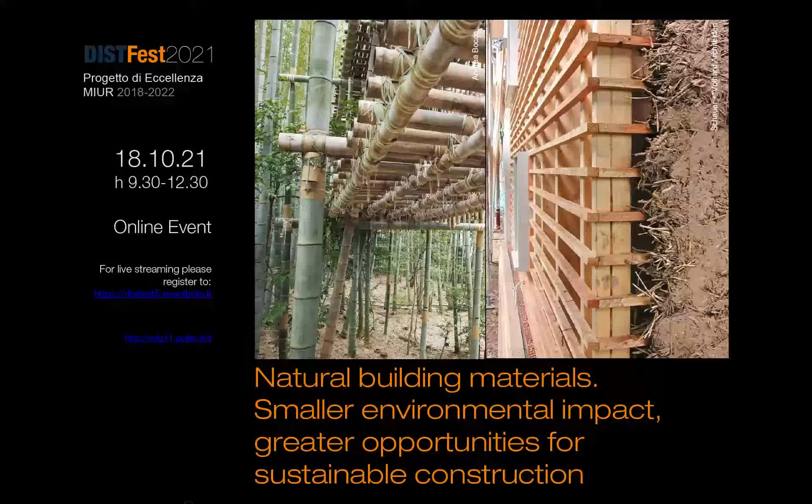As you might be aware, DIST, my department, is a so-called excellence department in Italy. We won a national competition, or rather we were among the many winners of a national competition 4 years ago. We were supposed to present a research program, and our idea in 2017 was to assemble a quite diverse group of initiatives under the umbrella of Sustainable Development Goal number 11.

You are certainly acquainted with the UN 2030 Sustainable Development Goals. Number 11 out of 17 is titled Sustainable Cities and Communities, and the overall goal is to make cities and human settlements inclusive, safe, resilient, and sustainable. Each goal has a number of sub-targets. Target 11C is to support least developed countries in building sustainable and resilient buildings utilizing local materials.

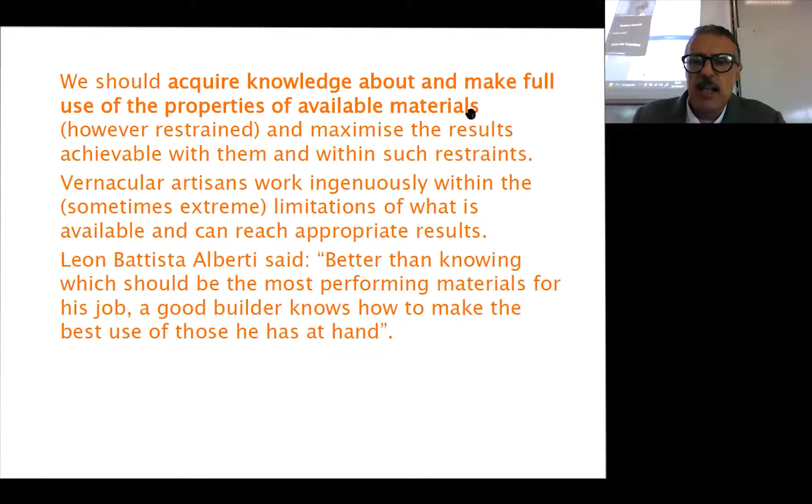Notwithstanding its long history, natural construction is still at a pioneering stage, because in spite of admiration of vernacular architecture, this is perceived as something belonging to the past, something backward. So today it is quite a problem to obtain building permits, in spite of the fact that natural materials, which were in use for centuries, are now considered very dangerous.

There is much more faith in synthetic materials that are likely to degrade in a very short time. Now, it must be understood that industrial substitute materials have usually been developed to reduce labor and construction costs, not so much to increase the quality or security of buildings. So their widespread usage is more the consequence of investment in money and effort spent to deal with these problems than their superior performance.

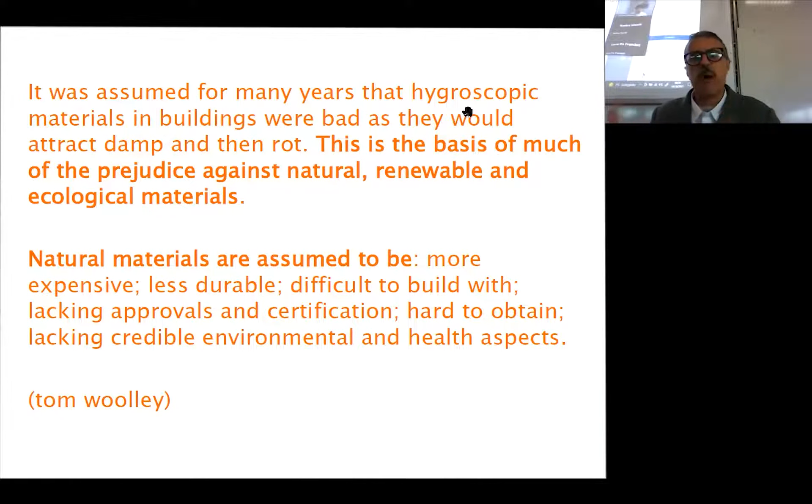It is a common experience that natural materials are assumed to be more expensive, less durable, difficult to build with, lacking approvals and certification, hard to obtain, lacking credible environmental and health aspects. Some of these assumptions are actually true or partially true, but this is not always the fault of the materials themselves - it is usually the problem of the socio-economic system around these materials.

In fact, the slightly higher costs associated with building with natural materials is the result of a tax system or a subsidies system which encourages the use of fossil energy rather than human power.

Anna Heringer said in an interview a very interesting thing that I like to quote here. She said, 'I think that it is not the missing technologies that prevent us from building sustainably. It is not the missing consciousness either. It is the fear of vulnerability and transience.' So we want buildings which are indefinitely durable, perhaps even an excess performance of durability is included there.

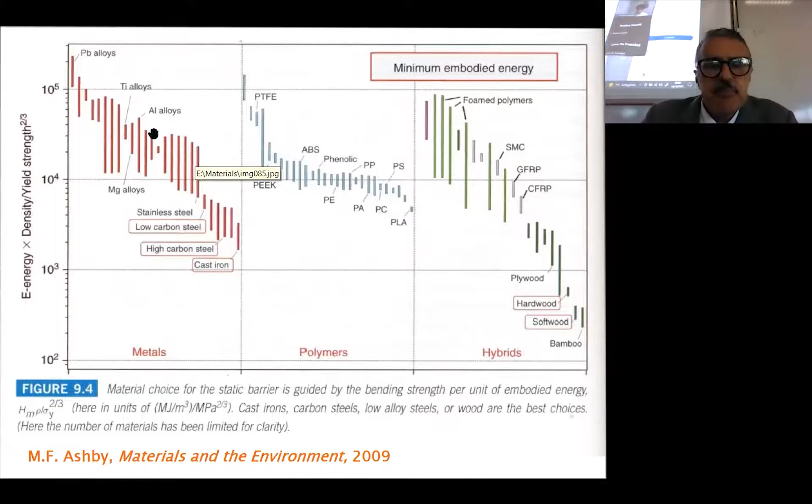Acquiring the ability to design a building using simple technologies based on good craftsmanship and careful selection of local and natural material can be a task, as does obtaining a building permit. These materials are often not covered by standards or environmental assessment software, and this is also why it is so difficult to make use of them.

But nevertheless, it must be admitted that not much is actually known about natural materials. A detailed and scientific understanding of their properties and characteristics should be developed, also relying on experimental buildings and field study of traditional buildings. And these are among the reasons why I treasure so much the contributions today of Professor Toki and of architect Volhard, because they have developed a deep understanding of some materials and have tested scientifically the properties of these materials, and at the same time have been using these materials in real buildings which work. So it's not an ideological stance. It is a very practical knowledge that has been developed and tested over many years.

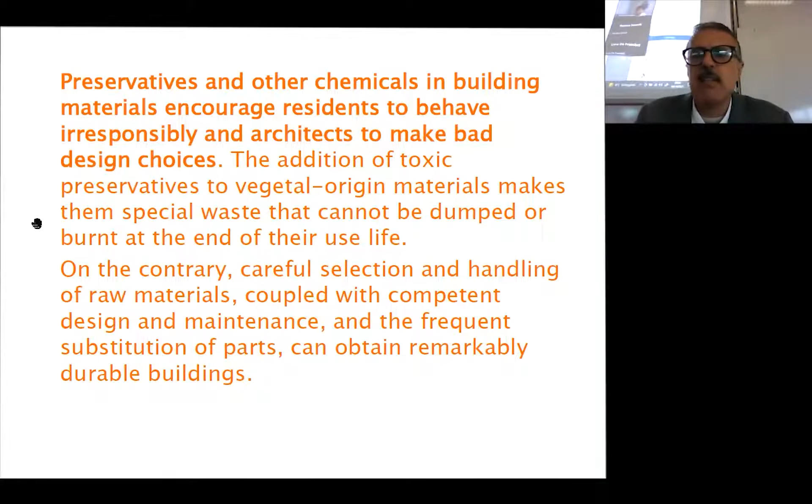Preservatives and other chemicals in building materials encourage residents to behave irresponsibly and architects to make bad design choices. And there is also a health problem connected with the use of chemicals and preservatives in foodstuff, as well as in the materials we use in our buildings, in our homes.

Typically, the mainstream medical view downplays the significance of environmental causes, raising doubts about environmental improvements because of the cost, and instead they prefer drug treatments. While, of course, the first step would be rather to avoid contamination. But we have been taught to live with contamination, to tolerate it, to accept pollution as a part of progress, as a part of our daily life.

It must be very clearly stated that every petrochemical product is toxic. It is just a matter of extent, how much, either to people or to the environment or both. It is also very difficult to recycle materials, even metals, if chemicals are involved.

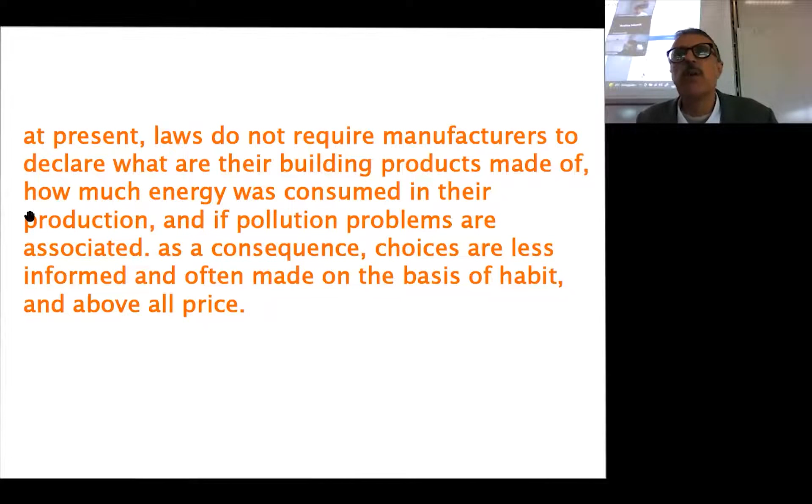I think that Peter Harper's low carbon materials plus industrial vitamins is a very interesting concept, which epitomizes a realistic, balanced position. Because, bluntly, modern projects can be built with a majority of little transformed natural materials whose environmental impact is very limited, plus a few highly manufactured products which allow us to obtain a few irreplaceable performances which cannot be reached otherwise. For instance, today's buildings reach very high performance, largely thanks to technologically advanced windows.

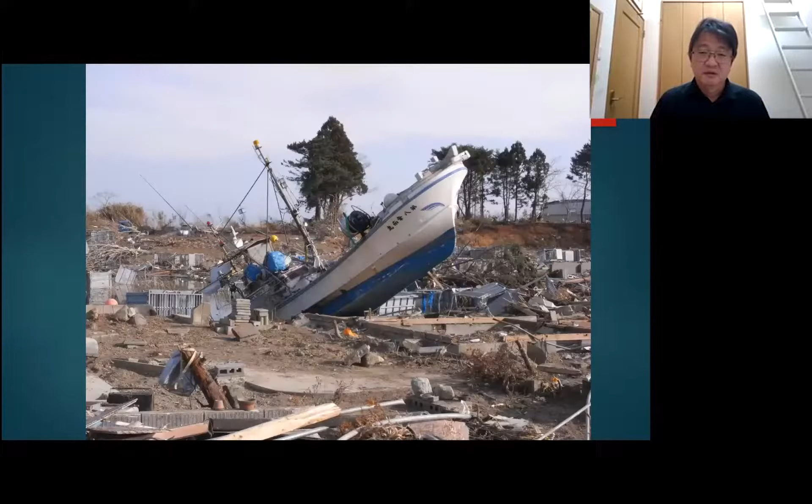So why use bamboo? The short answer is there was nothing other than bamboo. We had neither money nor material, yet there was a lot of bamboo. Professor Toki talked with one local who said we need to rebuild the town, not for you, not for me, but for our children and grandchildren, so they can see a town they can be proud of. For that we must persevere. But what can we do when we don't even have a place to gather together? Professor Toki felt he had to do something, as a person and as an architect.

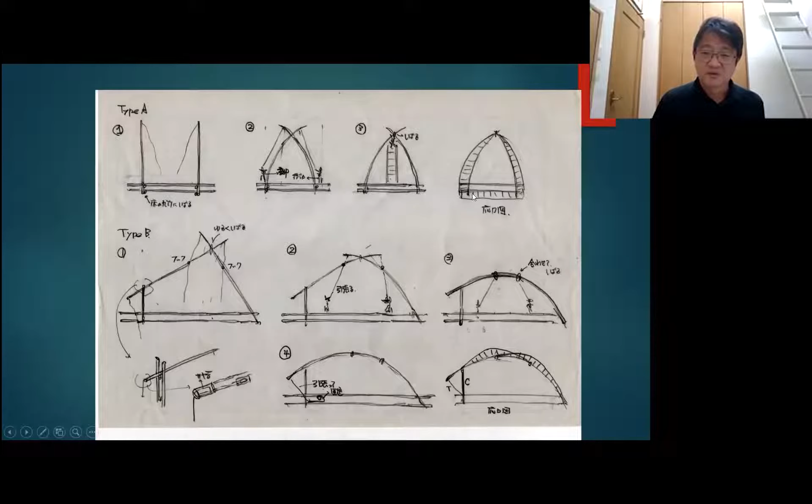The answer we got was an arch, a self-supporting arch assembled on the ground. With bamboo's strong repelling force, normally one would make concrete foundations, but we couldn't do that. So we made a truss below the bamboo and connected the two fixed poles with ropes in the middle. With these frames, we could line them into a radial shape to support the roofing and make the structure of a building.

To create an opening so people could get in, the heights and widths of the frames were gradually changed as they were lined up, resulting in an endless spiral-shaped space.

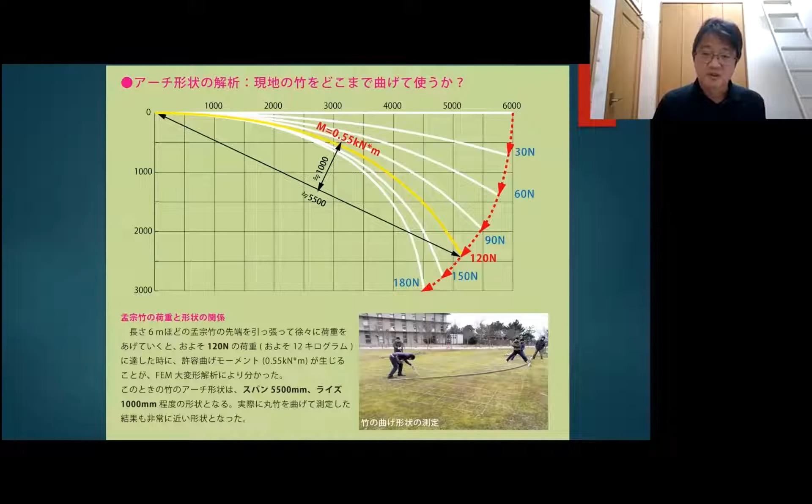We didn't know much about the material, so we needed to understand it more. We brought back plenty of bamboo to our campus and ran experiments, mostly on the mechanical properties and how much a full-length pole of bamboo can bend.

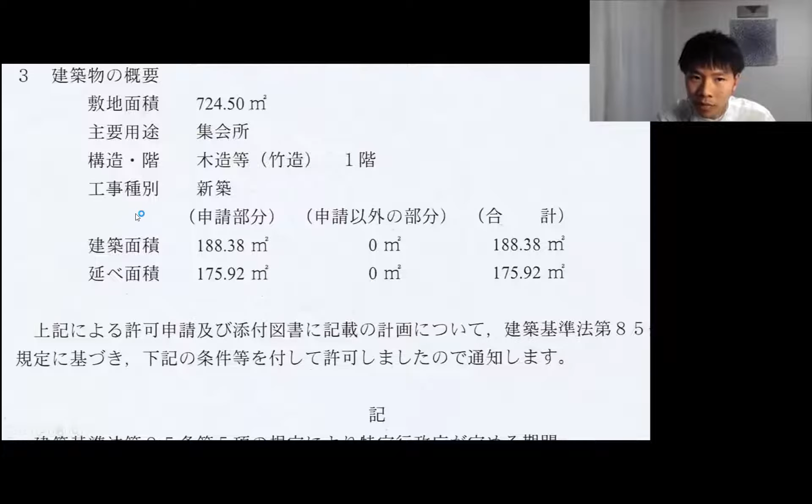Permits were a big problem at the time, because in Japan bamboo still hasn't been recognized as a structural material. There had been few to no bamboo structures in Japan until Bamboo Arch passed the application. Although only a temporary structure, Bamboo Arch, as far as we know, is the first full bamboo building in Japan.

After permission was confirmed, it was time to construct. About 40 students from all over Japan gathered to construct the arch together.

There was nowhere for us to stay in the disaster area, but thankfully a local offered us the use of their backyard, so we set up camp there. Construction started with clearing the rubble and praying for those who had lost their lives in the disaster.

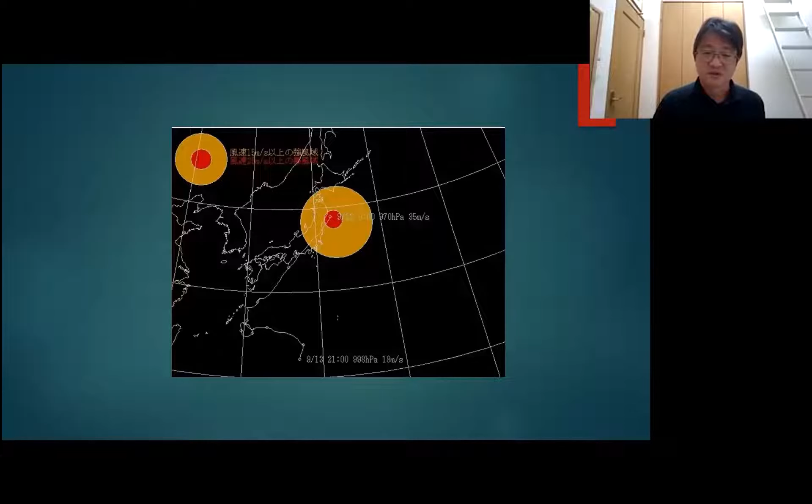Just as the frames were standing, the typhoon hit directly. We went back to camp, and the next day at the site we found everything had been knocked down. It was hopeless to say the least, and everything went dark in front of my eyes. But looking closely, though fallen, nothing was actually broken, so we could stand it back up and rebuild.

We held an emergency meeting, with only 5 days left until the deadline.

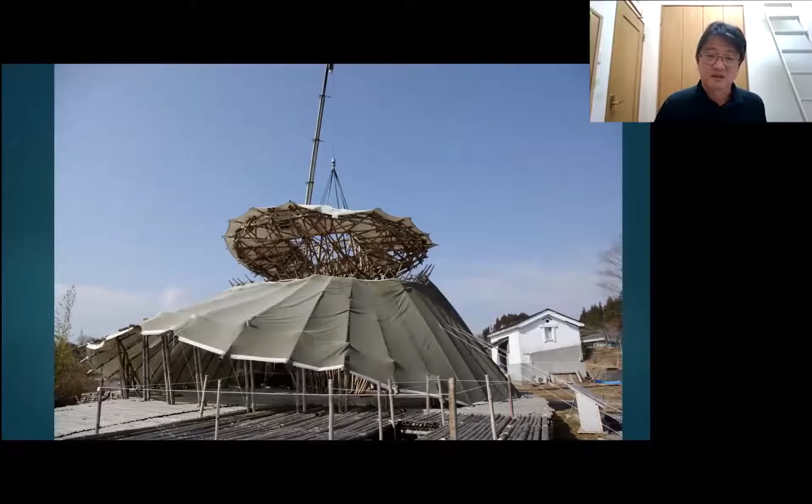After 7.5 years, we brought some of the dismantled bamboo back to our lab to study its strength and condition, and the rest was ground into chips and returned to the earth as fertilizer.

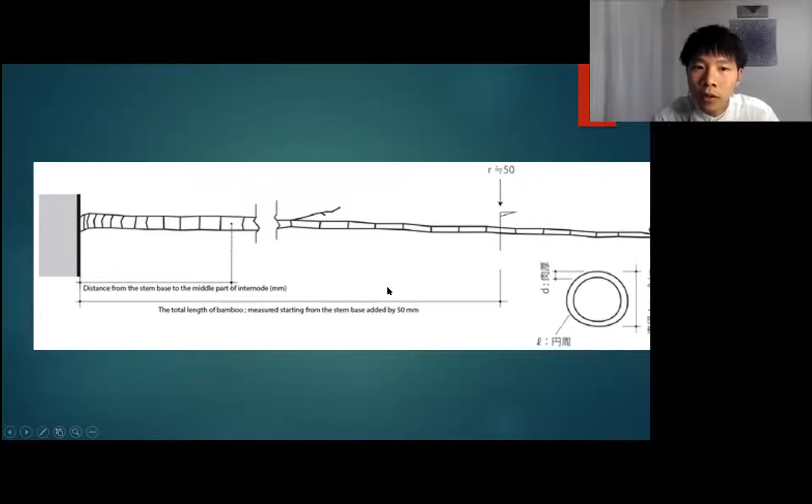When using natural bamboo as-is, the first challenge is that the cross-section is unknown - the diameter and wall thickness gradually change, making it impossible to calculate. This was the biggest problem: the section size differs for each unit and each point along the length, making structural analysis hard.

So we split the harvested bamboo in half and measured the diameter and wall thickness. We did a full research to find out the rule for how the diameter and thickness varies.

In Japan there are two main types of bamboo, Moso and Madake. Each has different properties, but we found that a formula could be established for each. While each type differs in its rules, sure enough there was a rule for the size change - with this, one can predict the whole cross-section of a bamboo by only knowing the root size, though the rule differs for each species.

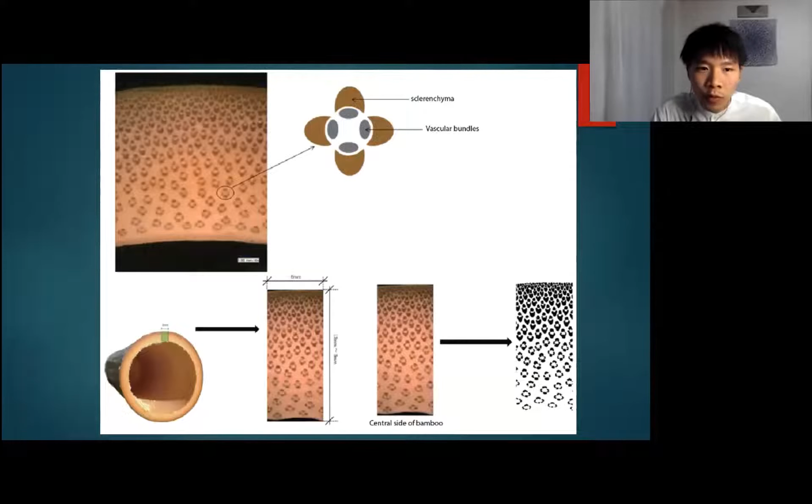Looking closer, there are vascular bundle fibers in the bamboo's cross-section that become denser toward the top, which explains the higher strength. Under the microscope, we found the cellular walls at the top of the bamboo are denser than at the roots, and concluded that's why the upper part is stronger.

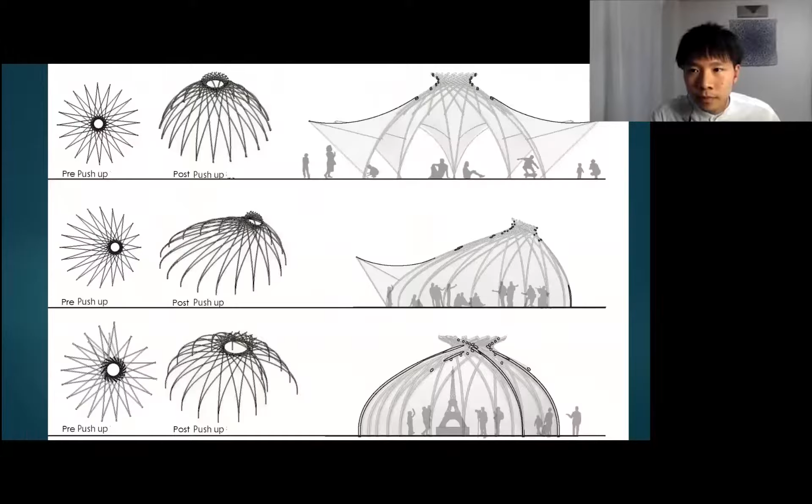Our second approach is to make use of engineered bamboo. Bamboo has about 10 times the strength of wood and one-third that of steel in tension - we wanted to use this to create new, delicate architecture, making bigger spaces with even smaller structures.

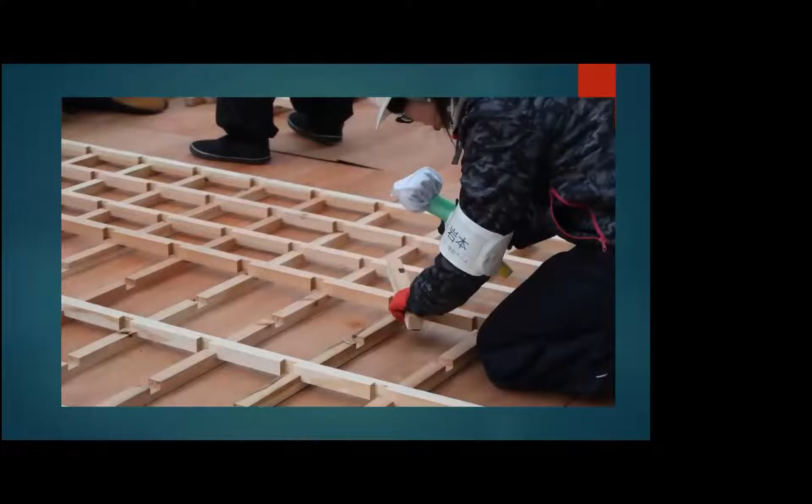We disassemble and hold workshops in various places. This is a mobile roadside shop we built in a disaster-struck area, aiming to give dreams and energy to young people in the local community - we did it ourselves to give hope to local communities.

The project just introduced was made with wood, but using bamboo instead could make an even bigger structure - that's what we're developing now. It should be possible for bamboo to make an even bigger structure.

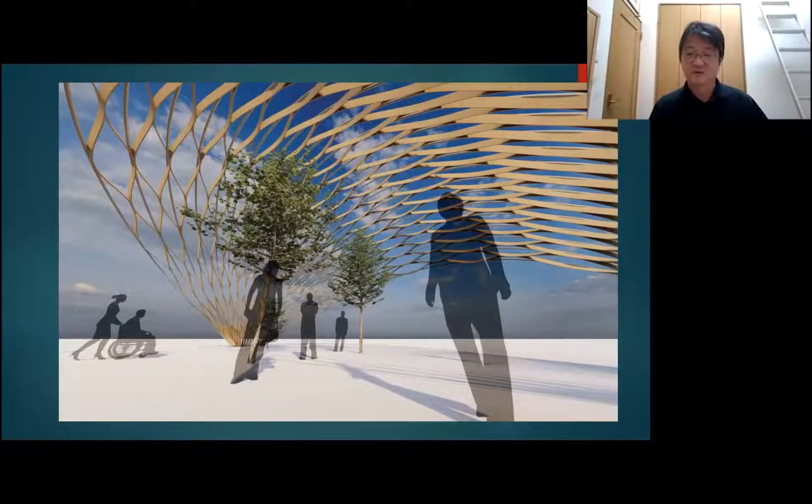This project is our idea to combine both the natural and engineered sides of bamboo. The next one uses planed members that expand when pushed and pulled, like an accordion - this architecture was conceived by Sebastian, who proposed it to Professor Toki after seeing a fruit net in a supermarket.

This involves bending boards, stacking three together, and combining them to build a dome - a study in progress. It's a further development of previous ideas, creating a dome with triangular members; the system is the opposite of a polar dome, using bending rather than compression.

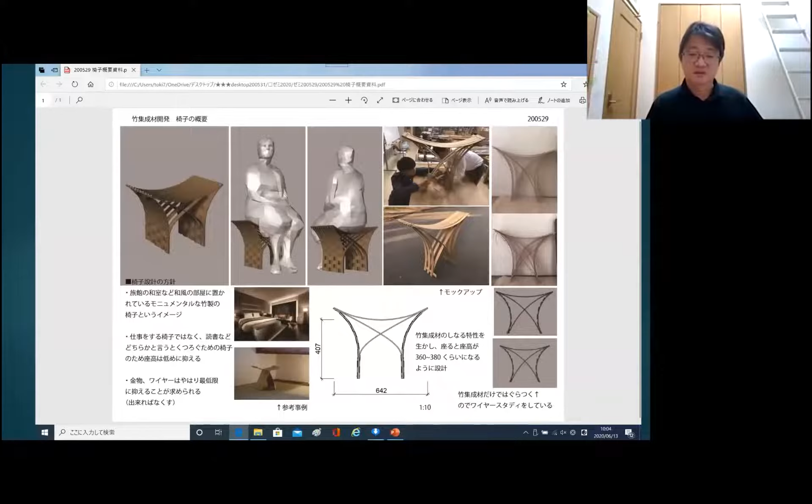We also made a few designs for furniture using these systems, utilizing the elasticity of bamboo to create chairs that suit themselves to the users like a spring.

This is a proposal that we did with architect Shigeru Ban for Oita Hovercraft Terminal. Oita is famous for its bamboo craftsmanship, so we needed a design suitable to be its landmark.

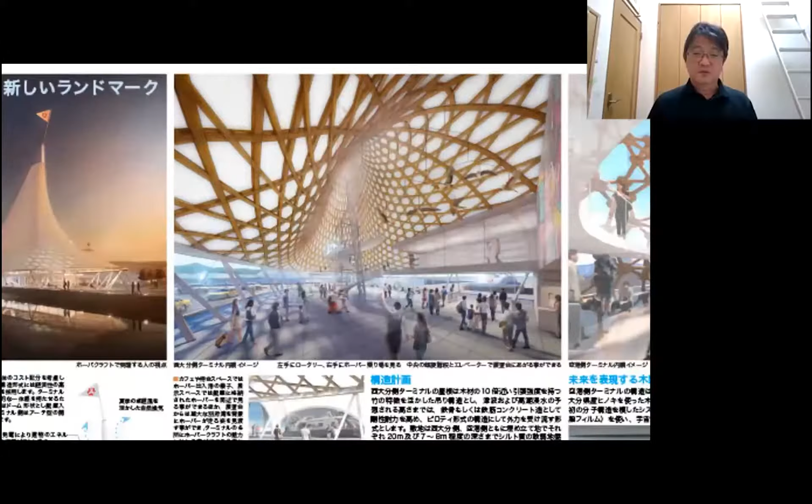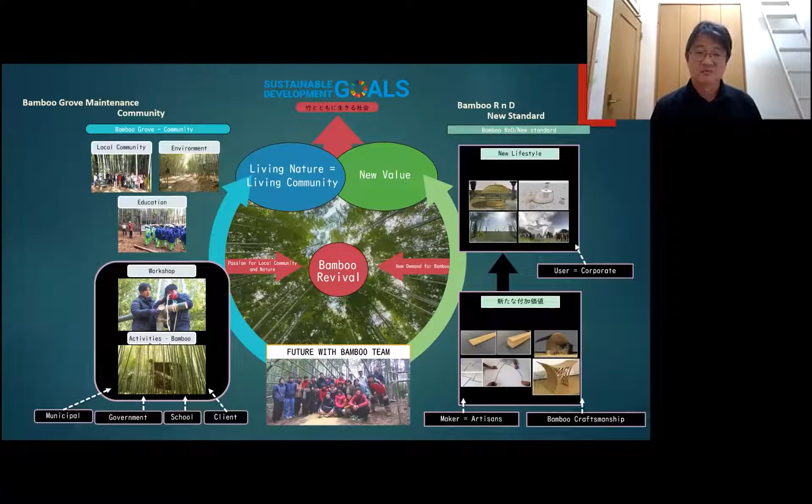We have no power or money to change society, but if people become familiar with this material called bamboo and think of new value, society will eventually change. With that hope, we continue these small activities to help bamboo touch the hearts of people and ultimately to better our community and society.

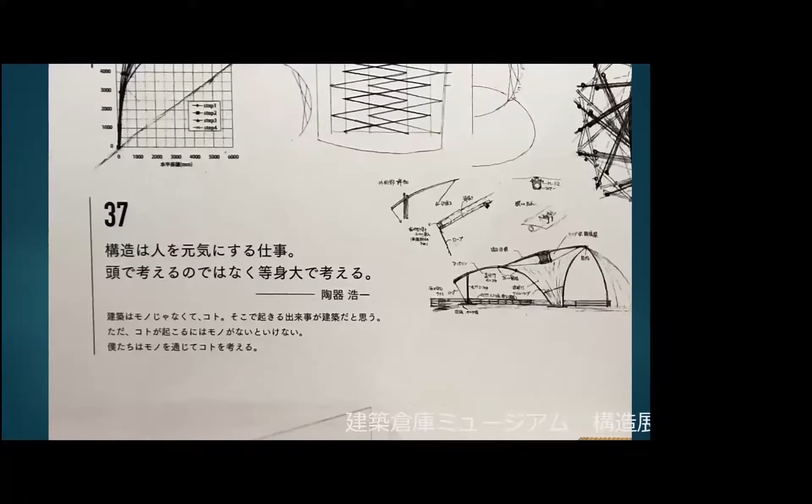And finally, I feel this is just like education, isn't it? Thank you for your time and attention.

So thank you so much, Professor Toki. Thank you so much, Vincent, for the translation. I find that your speech has been extremely interesting and touching, because it really couples technical knowledge with the spiritual motivation of doing things. So thank you so much.

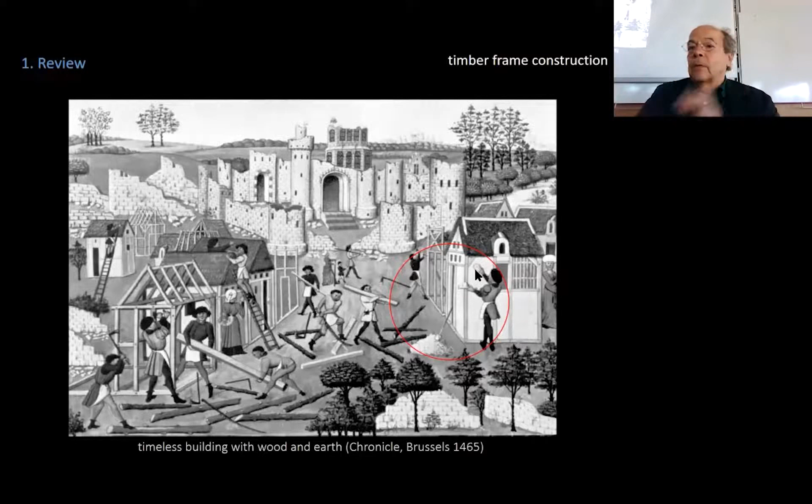Very good. Okay, I start with some pictures of the history. Building with wood and earth is very old. Here is a nice picture in the foreground, they erect the wooden construction, the timber frame. And here you see somebody, he takes some straw clay, it's ready mixed in this state, and he fills up the spaces between the grid of some stakes and wattles. We fill it, you cannot fill the whole space just like that. You must have a structure to hold the soft material.

Yeah, here this. Oh, my mouse, you don't see. How can I see my mouse here? My mouse? It's not possible. Here. Okay, I hope it works also with the next. Yeah, still okay.

The framework construction is a construction to save the amount of wood. Before they built it more simply, with the log construction, massive wood posts or horizontal layers of wood. You just build the wall, and you have the problem that the air will penetrate, and it's cold because of air ventilation.

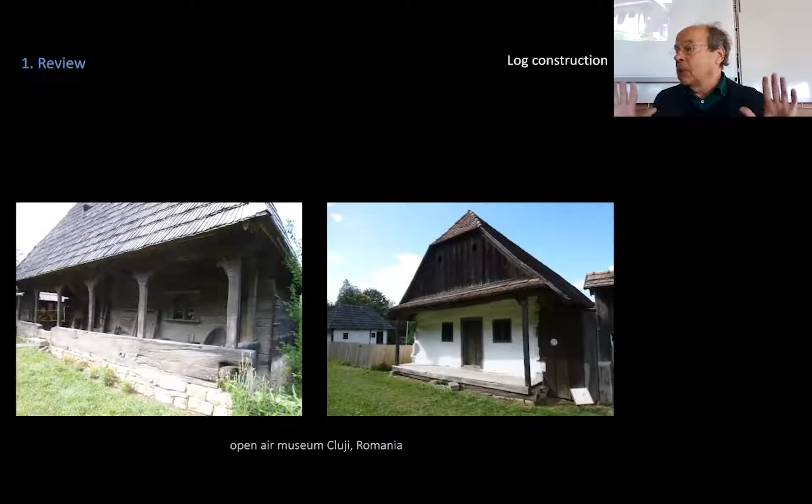So they used, from the beginning I suppose, to tie the joints with earth. Here this is in an open air museum in Romania, and there you see both the old system and then the sealed system with earth. It's interesting, but later there was not enough wood. You use wood for all purposes, to burn, to make food, to cook, to make ships, for the war.

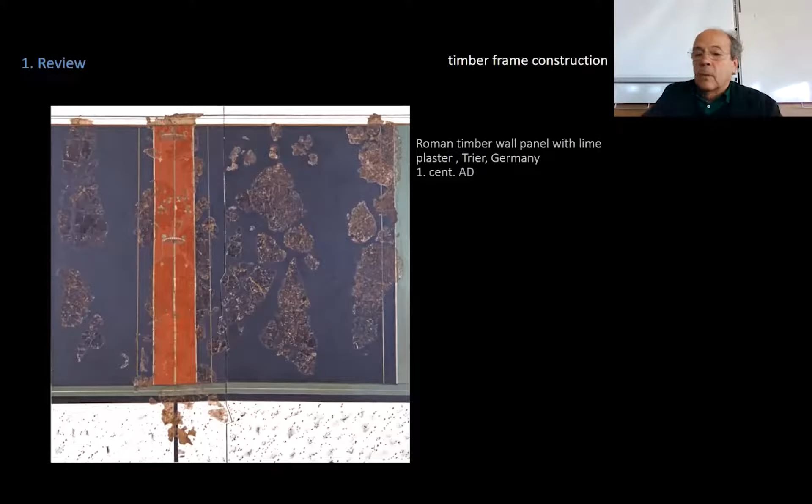Even the Romans were in Germany during the time Jesus Christ was born. From this time we have, in a museum in Germany, a Roman wall, a Roman half timber construction with straw clay filling and the traditional Roman lime plaster, and then alfresco lime coloring ornamentation. It's 2,000 years old and still existing.

It's interesting, you find there are many variations of the space in the panel, the structure to hold the straw clay. They are wattles, these are willows, branches of willow, or hazelnut, or only stakes, vertical or horizontal. All you can find, you can imagine. You play with the material, and everybody has another idea, so you find many variations of construction.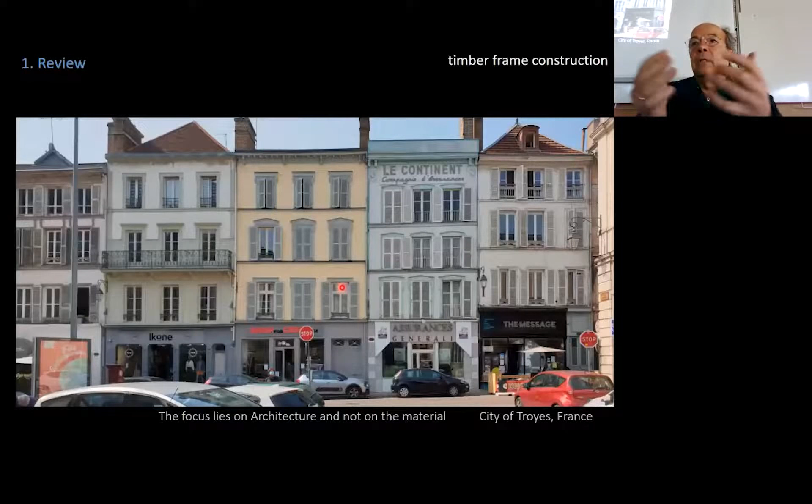Mostly the material wood and earth is not shown, not presented for the public. It's hidden behind a plaster, and they wanted to make architecture, classical architecture, not showing the material. The material earth they didn't want to show because it's dirty or brown, or they decorated their houses and made architecture. Another example in France.

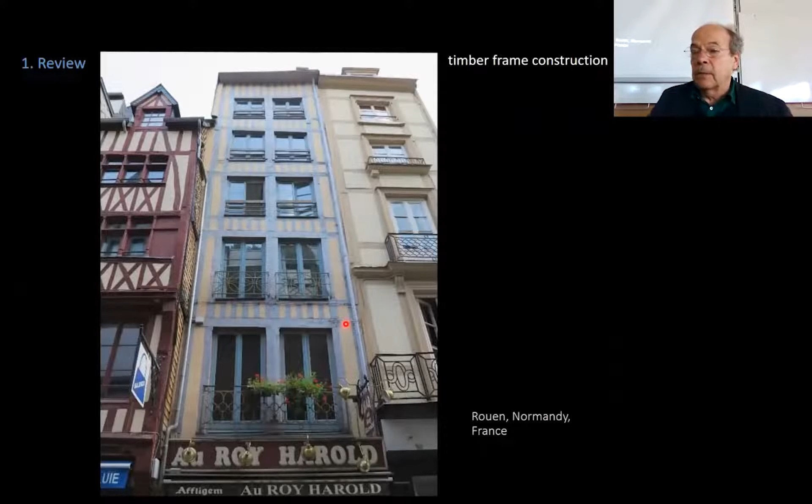I also have examples in Germany, here 6-7 stories high in the center of cities. You find these big, tall buildings, and nobody speaks about earth. It's town architecture. And this is in Rouen, in Normandy.

But also in Normandy we find a very curious method to close the space between the columns - this zigzag stakes. You find this characteristic vertical division, geometrical division of facades. These narrow spaces are the reason - you have diagonal small pieces of wood which are just fixed in, fence in the posts.

In Normandy we see very well maintained houses, but also very bad qualities, where the plaster is falling down. It's very bad quality, and the reason is there is not enough straw in it.

Here I will show a good example of straw clay, in our town Darmstadt, nearby Frankfurt. I made some experiments with water, and I can look inside the panel, and there is very much straw. The effect of this straw amount is to stabilize the volume of the panel.

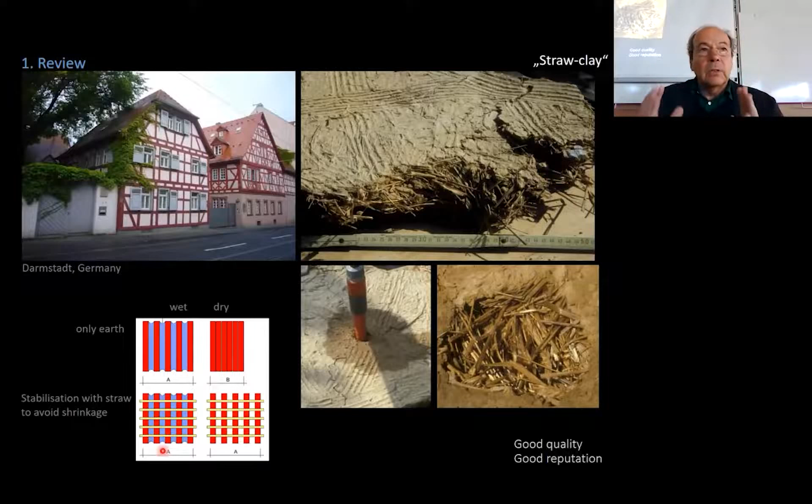If you have no straw, the panel will shrink, because the water goes out, it evaporates, and the volume will be smaller by drying. But the straw content will maintain the volume. That's very important for good quality.

Also, the straw structure is good for adherence of the plaster, because all these fibers are activated by scratching the surface, so the fibers go out, and the lime plaster can adhere very well on the ground. This is a principle - also in the lime plaster there are fibers, from cows.

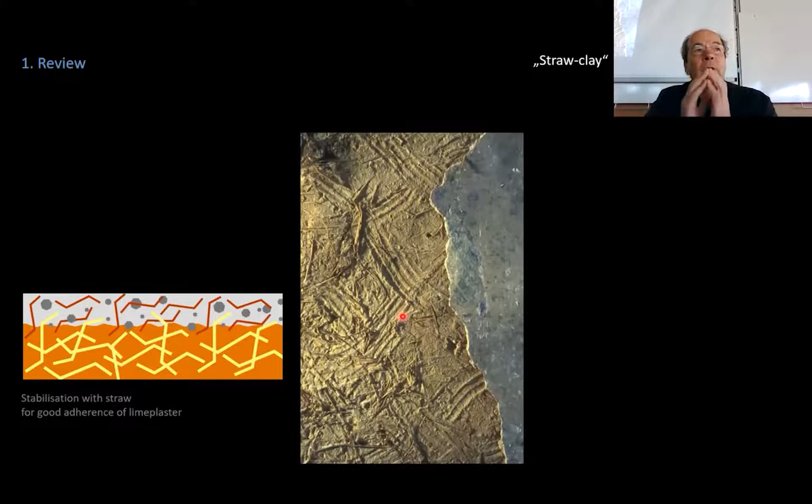Both fibers are connected together, so you get a good quality bond between the plaster and earth ground - you cannot take the plaster away. But if you have no fibers in the ground, for instance with a rammed earth house, you have only earth, and if you put lime plaster directly on it, it's really very bad, because there are no connections, and so the lime plaster will fall down.

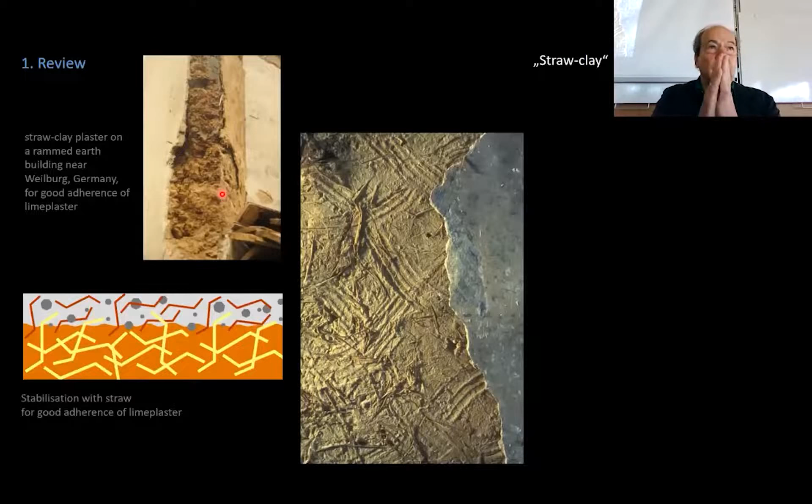I found here nearby Weilburg a region with old rammed earth houses. They first put a straw clay plaster on the rammed earth. It sticks on the earth, and the lime plaster sticks even better on this straw clay layer. It's an undercoat plaster, if you want.

Later I studied and did research on all these old straw clay panels, and in this very old house, 700 years old, I could do research on five panels, and I found very interesting results. I will focus on just one aspect, one panel.

This one is from 1583. I found that the earth is not applied like a mass, like plaster. It's applied by hand, in big portions - they put the straw clay into the panel.

Here in this example, in diagonal portions, they make the wall like a cob wall. I don't know if you know cob - it's also earth construction, where you put portions of straw clay in alternating directions.

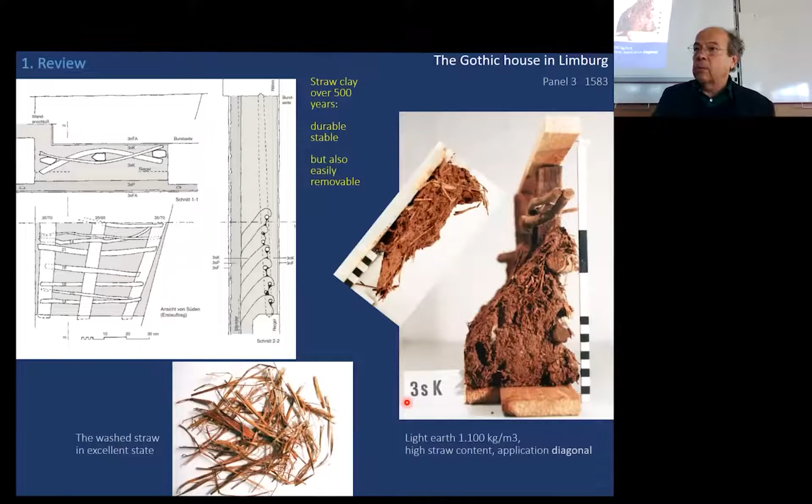What's also very interesting is that I could separate the materials, the straw and the earth, using water. I could dissolve it in water and reuse it, or analyze it - you see the result here. I could take out the straw, even the branches, the willows in it, and examine them. This is not possible with concrete - you cannot take the sand out, it's finished, it's a chemical reaction. But here it's bound only by drying, so you can repeat this process, drying and dissolving with water, every time.

We start with light earth. Can earth be a modern building material? This was my question as I started to get interested in earth construction. Which construction method is suitable? I will point out some aspects about the physical properties.

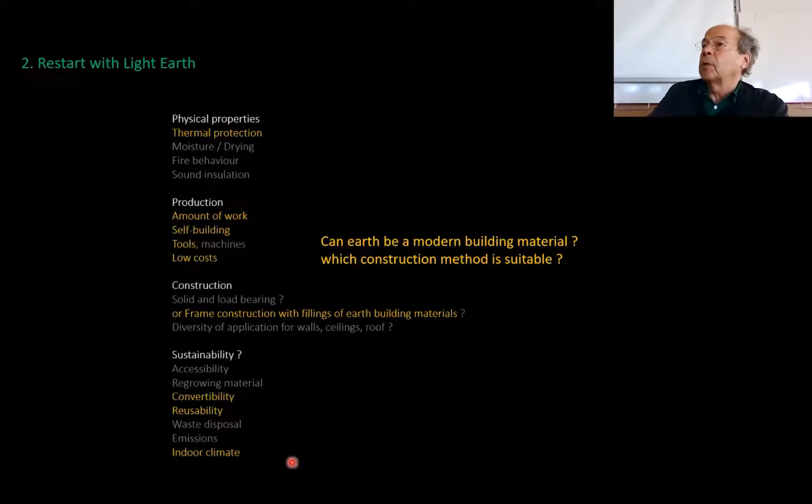What about thermal protection, moisture, fire, sound, and the amount of work to build? All these are aspects that are interesting if you want to start with earth building - load bearing or frame construction, convertibility, reusability, indoor climate, and non-toxic materials maybe is also an aspect from the beginning. I want to have good properties, and how can I start?

I studied literature, because in the 80s there was nothing - no products in earth, no contractors, no craftsmen. So we had to read books, and I found very many books written after the wars in Germany. There is a lot of literature about earth construction after the wars, because during the war there was no energy and no building material, so they were interested in earth building. And I found this...

method - it's a light earth building method, from this book, and it's very easy. I found it very easy: you put some earth in water, you make a slip, then you pour the slip over the straw, then you mix it, and you have some sort of a mess, and this mixture you put into a shuttering. This method seemed to me more simple and easier than straw clay.

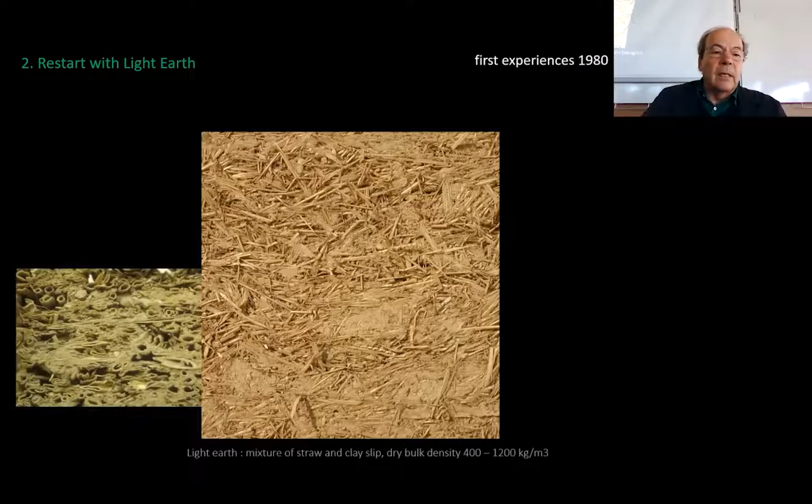This is light earth. If you look in detail, and if you cut light earth, you see very many spaces between the straw. These are air spaces, which give very good thermal insulation. That was my first reason to build a house: 30 centimeters of light earth and nothing else, only plaster or cladding.

This is a dining room with a ceiling in light earth, also the walls, and then the plaster with lime.

Next project, two years later, we were asked to build a low-cost house. I proposed light earth, of course, and showed pictures from the first experiment, and the client agreed. So we started, but this house is cladded with wood because we were worried about the adhesion of plaster on a new wooden structure due to the shrinkage of the wood.

This is a raw construction, a very simplified wooden construction, not comparable with conventional framework construction. You see very thin posts and no horizontal parts, and big spaces between the posts, not this narrow.

It's a wood-economizing construction. If you go in detail here, these are the walls in section. There are two here, you see? Here you see a double column - this is an internal wall. It's thinner with some stakes in it.

This is the children's room, and in this house we made everything with light earth - the external walls, internal walls, and also the ceilings.

Here you see the ceiling. We have some shuttering, and on this we filled up heavy light earth. It's a contradiction, heavy light earth and light earth, you can say. I differentiate because you can put in this mixture very much clay or very little, and reach a very heavy mixture or a very light one.

To increase insulation, we want a light mixture because of the air spaces inside. But if you want heat storage, you want it more heavy. Heat storage is wanted in the internal walls and in the ceilings.

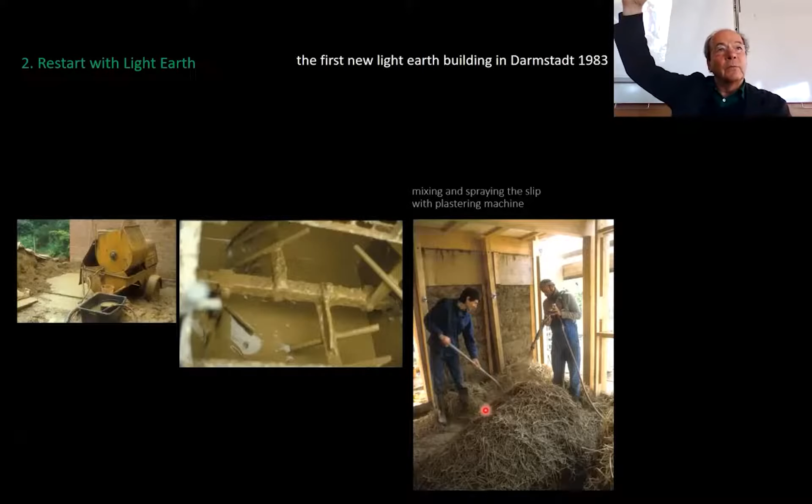In this project, after the first experience by hand, we tried to use a machine to accelerate the mixing process, to make the slip and pump it, to spray it directly in the room, also in the upper floor and in the roof. We transport by air pressure, by pump - we transport the heavy slip vertically, and then we can spray it beside the wall.

We fill it in. Also, the shuttering we have improved a little bit - we just move the boards, and it's simplified. That's the result, it's okay.

So after the first projects, I think three examples, in the first edition of 1983 I wrote this book, and it sold very well. Many people imitated it, or they were enthusiastic and started to follow these ideas. I estimate some thousands of applications in those times. It was very famous, this book - the first book about earth construction in Germany with this light earth.

Later, in 1995, I added a chapter about combining the light earth with insulation material, because we were obliged to think about that - the regulations on thermal insulation were harder. We had to follow new U values, lower ones, and we could no longer build 30 centimeter light earth walls even with very light mixtures. So I added chapters with insulation layers.

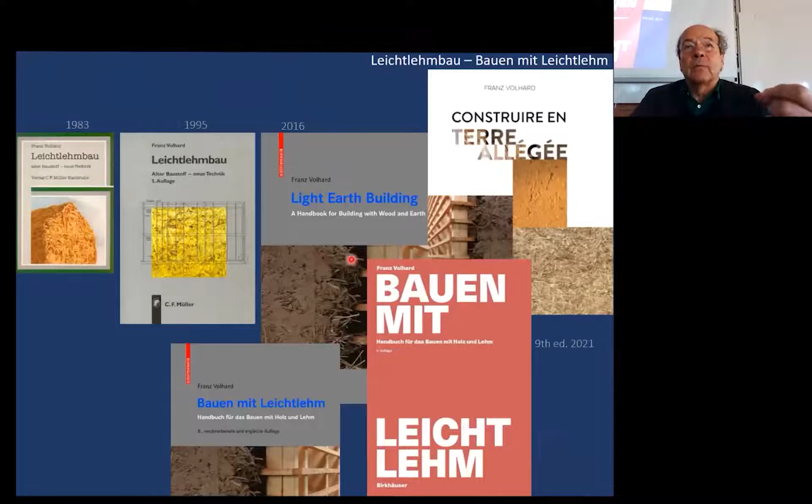And later, in 2016 and in the following years, I introduced a new method which I will show you later.

For the book, I did research, because no properties were known or written about. I researched the literature to find values and information about properties, and collected them all together to show what is known and what we still need to research. For instance, fire behavior of light earth - nothing was written about it. So I went into the cave and made some tests, comparing it with another classified material, and I can say it's not easily flammable.

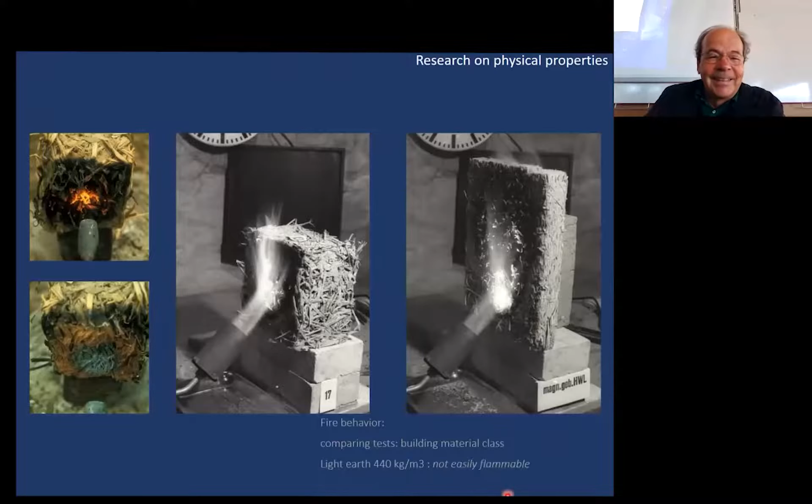Thermal properties were the main chapter. I collected values from the literature and found these values of lambda. Later I proposed these values for the official DIN norm - 4108 in Germany - and they accepted it. Now it's written in the official DIN norm, not all the values, but the main part, from about 500 to 2000 or so.

Then water behavior and moisture behavior - water is very interesting. Here I compared a block without fibers and a light earth block, a very heavy one, up to 1200. If you put it in water, after one hour you have this result - you see the great difference between the block without fibers and the block with fibers. You never put a house in water, but it also indicates other behaviors, for instance with frost. What happens if it freezes? One material will explode, and another will maintain its volume and stability.

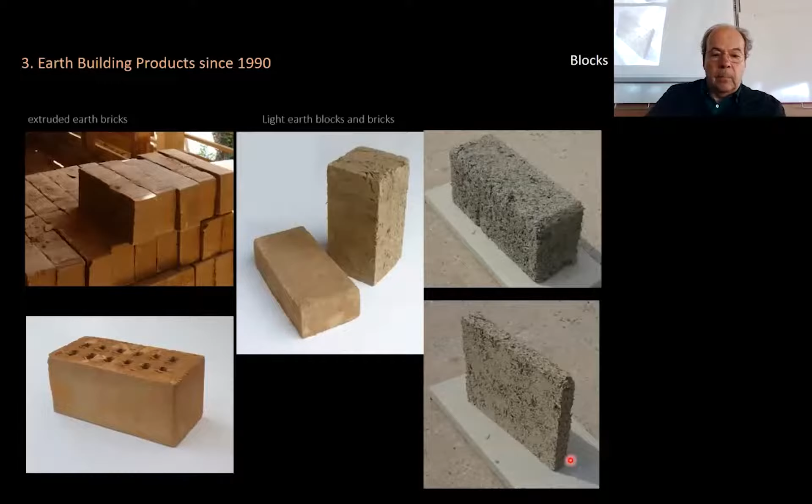That's always the same, and a very light block or panel with hemp. You can make light earth not only with straw, you can use light fibers, reed, hemp, or wood granule, wood chips, and also the blocks are made of different mixtures.

Panels are a big theme for the dry building, the dry made building. It's very advantageous. For instance, if you build internal walls in this environment, you would use panels and dried materials to minimize the moisture which comes on the side. It's prefabricated and very quickly assembled.

Mortars, this is the common method. You can transport them in sacks, bags and big bags, and it's dried material. It's a question of drying energy. Now they come to methods to dry it in greenhouses, with solar energy. It's perfect, it's no fossil energy, or little, but it's minimized. Drying with fossil energy is hard, it's nearly like conventional materials. We have not to forget this, drying wood is also an energy factor.

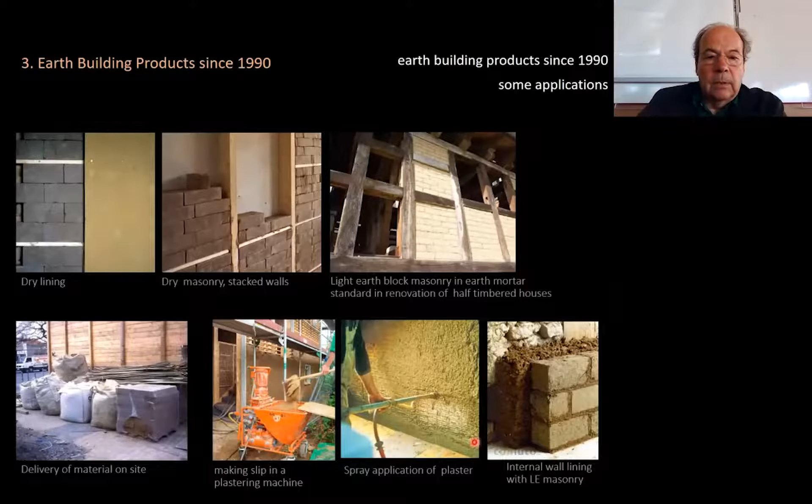I will start with some renovations. You see the facade, as shown before, is light earth masonry, and if the panels are still partly intact, you can repair it with the same material. You take the old material, mix it with water, and fill it up. You don't have to replace it all, only a little. Then you make a plaster, a straw clay plaster, or a new panel made with the traditional wattle and daub method. The ceilings are real earth rolls, maybe you know this method.

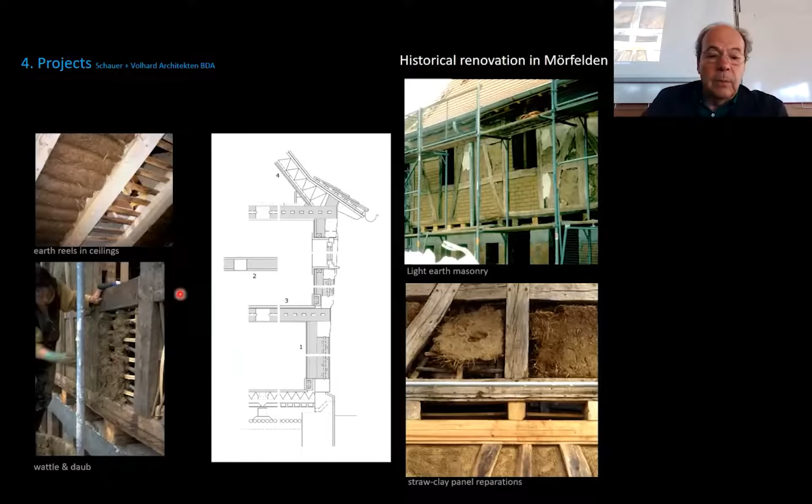Here you see it from above, and then we insulated the external walls with some light earth from inside. Here's the construction, and we filled it up. You'll see this in the next project, it's nearby.

Next project, also a half-timbered house. This is the addition of light earth insulation from inside with earth panels, wood chip, light earth, and then finishing with lime plaster. A new extension with elements of half-timbered construction, and completely dry earth building materials in the walls and in the ceilings.

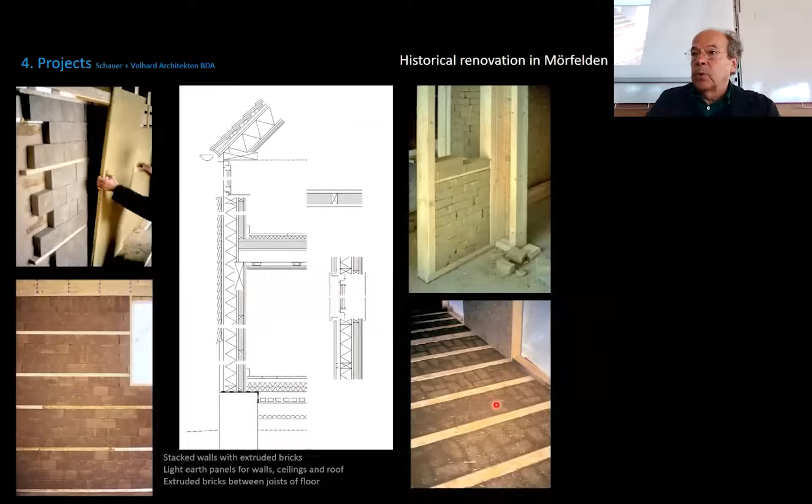In the external wall, there's an additional layer on the inside, and in the internal walls, a completely infilled construction of extruded earth blocks. On the ceiling, also extruded earth blocks, because they are the cheapest materials, just unburnt bricks, and without mortar. It's very good because it's dry and very quick.

Another renovation project is the Sandberghof. It's a Gothic house, and here we have for the first time an internal insulation with some insulation material, with cellulose. This is a preparation, and at the end it looks like that - this is an internal layer. The ceilings are prepared like that: old ceiling, old earth reel ceiling.

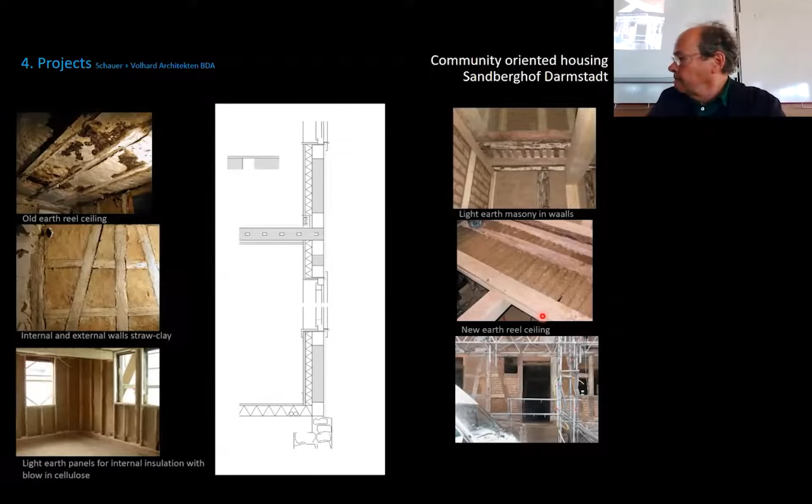It's partly in good condition, but sometimes the beam is damaged, and we have to repair it. This is a preparation, and then we make the earth rolls on the table.

This I want to show here. It was a demonstration from a French craftsman. It's a portion of hay. He took hay, spread it on the table and coated it with slip.

A container is fashioned to define the required quantity of slip. This is the container. The resulting light earth mix is rolled onto the riven wood stakes. You don't mix a mixture before, you just mix it on the table. It's very quick, and this is the result. It's a very good method to make ceilings, but also walls, external or internal. The next projects I would apply this method for all. It's very good.

Next project, it's not a light earth project, it's made with extruded blocks, very cheap, in self-help. The whole house is self-built. And here we add the insulation from outside with sprayed-on cellulose, and then a cladding, also self-made. You see the structure inside, the wooden structure, and it's a very warm house with very little energy needed to heat up.

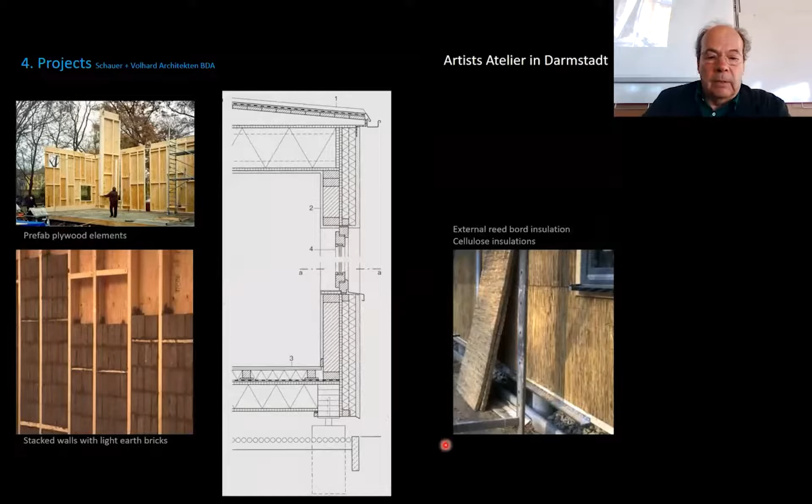It's very good. Next project is a new building with some earth filling in the external wall from the inside, and then outside two layers of reed boards, also a prefabricated element. We had to build within half a year, from October to April, in the winter time. It's possible because we used dry earth material. Only the plaster was a problem.

Because it has to dry, it was dried with artificial drying machines. It was possible. The internal walls are masonry of light earth, and then an undercoat earth plaster, and then the finish is lime plaster. And this is also earth architecture, but you wouldn't say it's earth architecture, okay?

Now, the last project is in Darmstadt, also in our town. And here I want to show a new method of manually free-applied light earth. It's not within shuttering, it's just put on the wall as I found it in the old house, and I developed it a little as I found it. You can find it in Normandy.

This is a torchis there, but with light earth, very much quantity of straw, and the density is about 1,000 kilo, and the insulation is from inside. Also prefabricated elements and some lattice to put in the work. He worked from inside against a shuttering board, which is fixed provisionally, to have a flat surface for the lime plaster outside.

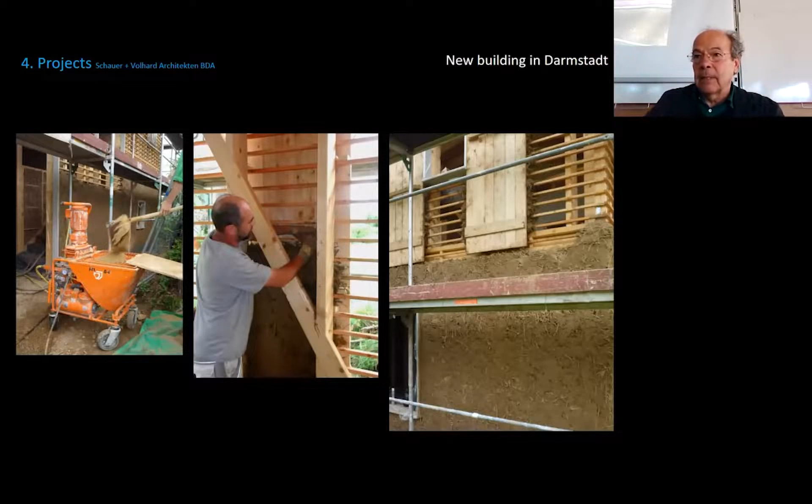The machine is very helpful. Also, we spray in the upper stories with pump and air pressure. We mix it in the room.

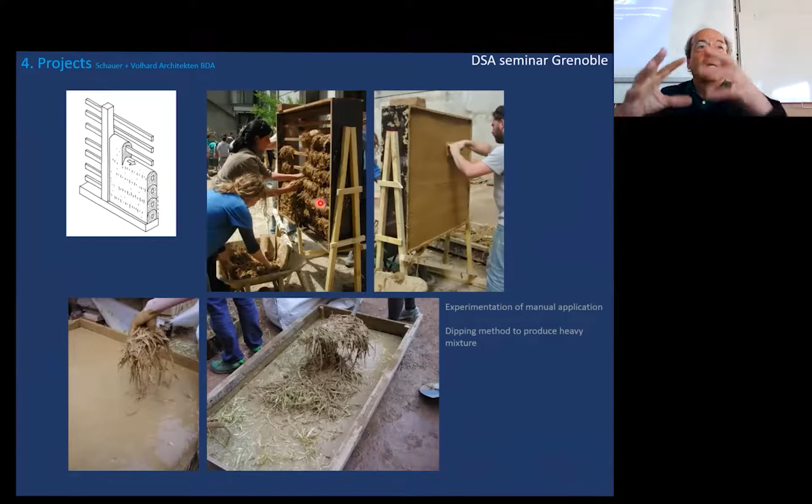A little excursion also to Grenoble, where I made some courses and a demonstration experiment. This I experimented with students before we made this house, to be on the safe side. I wanted to know, is it possible? Does it go in a certain reasonable time? Is it hard? Is it good? Does it work or not?

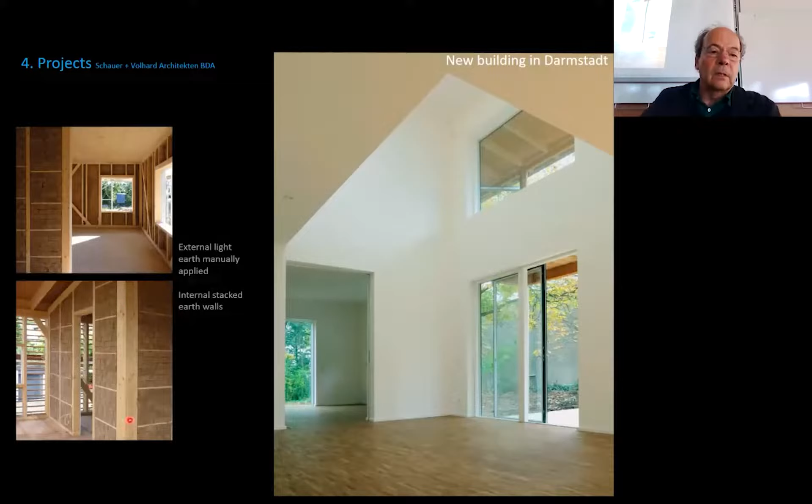And there we tried this simple method of dipping. And the construction, as you see here, has the outer layer of light earth and the inner layer with thermal insulation. So these are the outer walls, and the inner walls we repeat what we made before in another project. We just stacked extruded bricks within the wall, dry, without mortar, some planks to fix it in the space, and so on. And this is a result. Also a very nice earth architecture.

So now I have still five minutes. No, one more project. It's also manual application, a self-building project, and the client worked herself with her father, and some students helped. And I want to show just... it works, doesn't work, okay, it's okay.

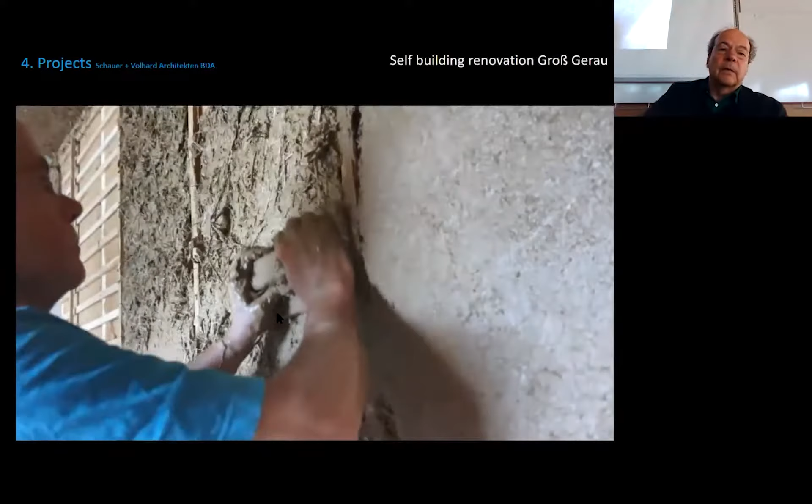You can see the consistency of this material. It's like a plaster, and you can throw it on the wall. You apply it onto five millimeters thickness only, because it's very, very smooth. And you flatten it. She fills up some. I cannot see the... I cannot accelerate. Okay, it's enough, huh? You see, it's...

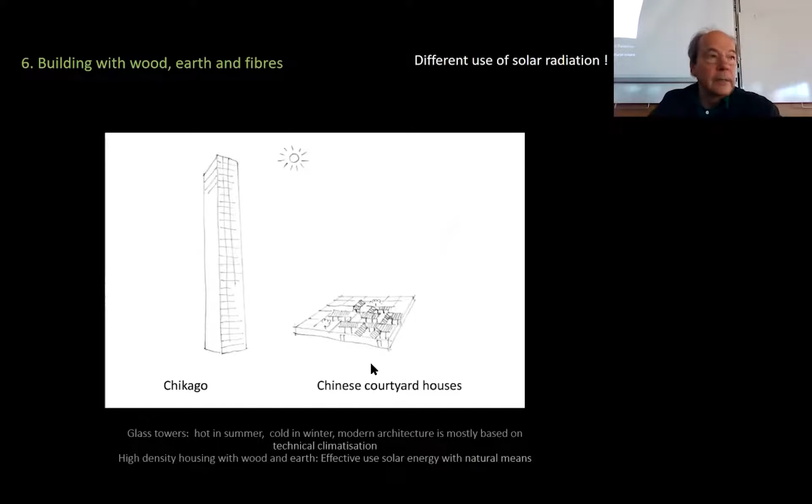The contrary is a high density, low rise flat dwelling development, for instance Chinese or Japanese courtyard houses.

Today wood construction is very fashionable—everybody wants to build with wood—but the normal construction is very complicated. We have light-weight insulation, vapor barriers, insulation levels. I don't know if you know that kind of construction.

Now we propose a construction combining heavier earth material together with insulation. Because of the moisture properties of earth and natural fiber material, we have the opportunity to simplify the construction. I'll come later to the humid or moisture aspect of this simplicity.

The mass in the house—if you have much more mass—gives you the possibility to cool it during the night. We open the windows and the night coolness ventilates through the house, cooling the heavy material in ceilings and internal walls. During the day, the sun and warmth, even with opened windows, is not enough to warm up the house very quickly, so you have comfortable temperatures during the whole day.

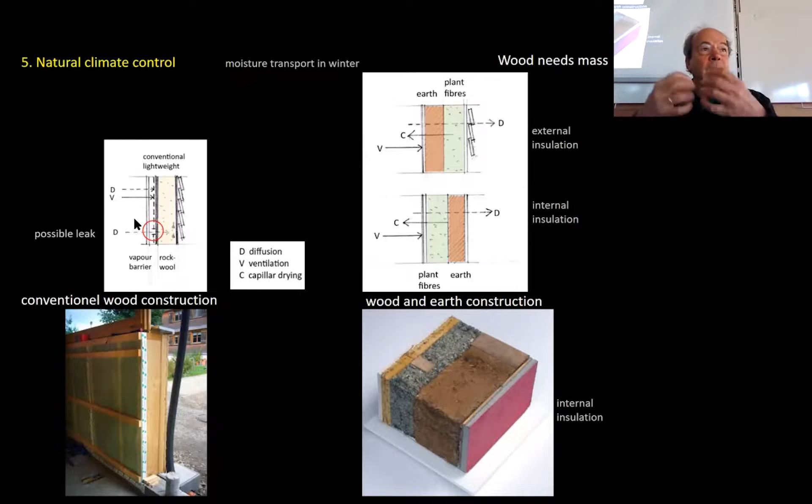Here we have only earth and cellulose in this case, with very good moisture behavior. Even with the conventional system, if there's a vapor barrier and a possible leak, you get condensation, and the wall cannot dry out because the rock wool is not capillary active—it remains wet and humid, which is not very good.

In contrast, with wood and some natural fibers, you have a ventilation stop with a plaster. Vapor diffusion is given because all the materials are open for diffusion, and you have a permanent drying process through capillary properties.

Now this is an aspect: your thermal mass of the external wall is seldom needed on the inside—insulation on the inside can be advantageous. The normal argument is that you have to put the mass inside the external wall; this is conventional, written in the books. But we say the contrary—put the mass outside.

You have the advantage of gaining solar energy in winter because it's gratuitous, free energy. In winter time you have sun and also higher temperatures during the day, and you can use this heat gain. Why insulate against the sun in winter time? So this is an argument for insulation inside.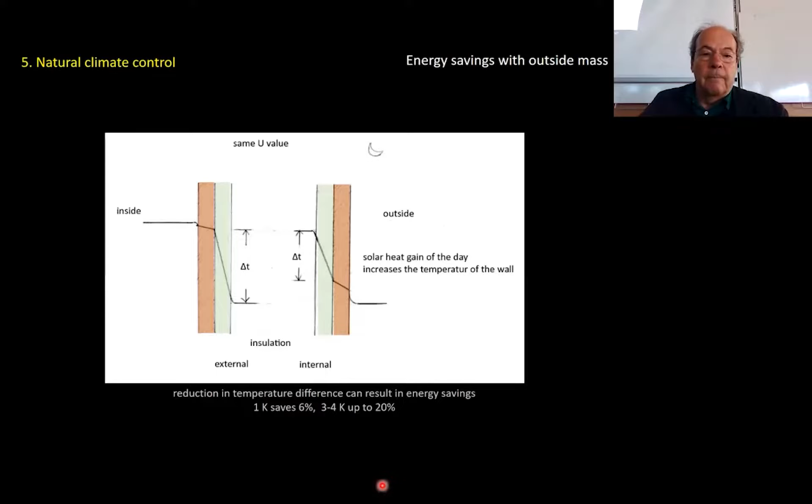No, okay. Now I want to make a little bit of a conclusion. This is my plaidoyer: building with wood, earth, and fibers.

We have simple constructions. The construction site is weather protected. This was the first aspect: working under a covered roof.

The wood is sparingly used for load bearing, while the earth is used for non-load bearing infill. This is a very old, very economic method, age-old. Also the bamboo structure of Mr. Toki could be thought of in these directions.

As used, simple constructions give more floor space through thin walls. That's very important. If you compare it with rammed earth walls, they are for themselves 50 or 60 centimeters plus insulation material, and then you have a 70 centimeter wall. This is not possible in town areas because the ground is too expensive for such walls.

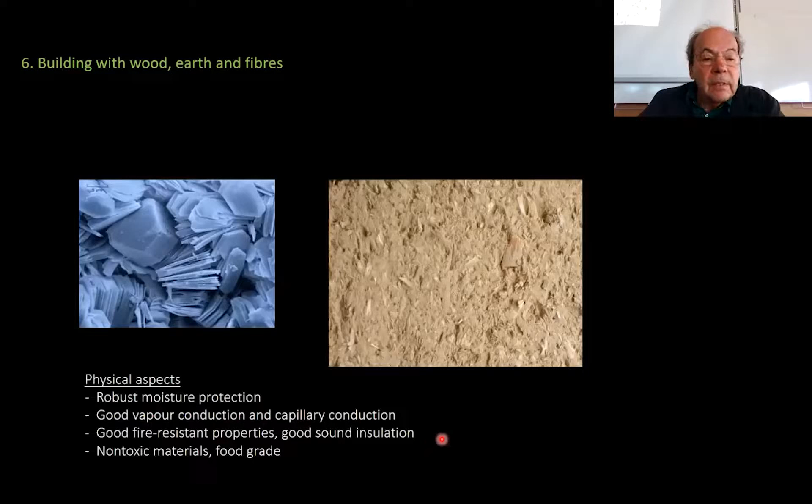Physical aspects: robust moisture protection because of these capillary forces, good vapor conduction and capillary conduction, good fire resistance properties, good sound insulation.

Non-toxic materials, food grade - you can eat earth even to heal your stomach. You can buy it in a pharmacy, some very fine earth, and after one teaspoon you have no more stomach problems. That's the whole story: wood and earth in collaboration with water and air. Air is very important to harden the material.